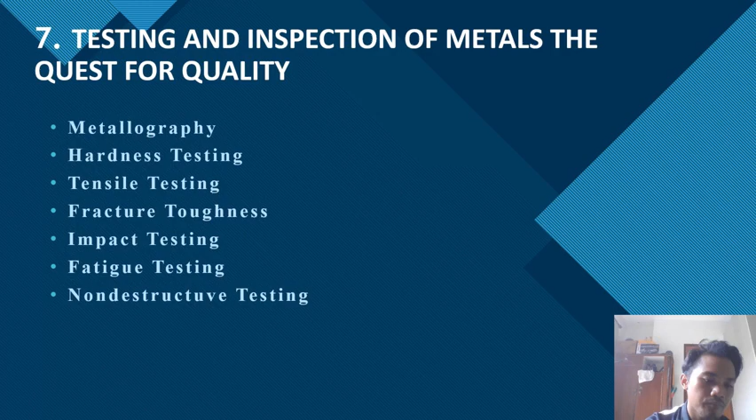Hardness testing is one of the most common non-destructive methods used to test metal products. Another important tool is metallography, which is a basic tool that helped transform metallurgy from an art to a science. Metallography also gives metallurgists an important tool in evaluating the quality and condition of metal products. Now we go to the first, metallography.

Metallography is the scientific discipline of examining and determining the constitution and underlying structure of, or spatial relationship between, the constituents in a metal and alloy. The examination of structure may be done over a wide range of length scales or magnification levels, ranging from a visual or low magnification, like 20 times examination, to magnification over 1,000,000 times with an electron microscope. Metallography may also include the examination of crystal structure by techniques such as X-ray diffraction.

Some history. The critical factor in the light microscopy of metal is the surface preparation of the specimen. This is the basic insight made by the father of metallography, Henry Clifton Sorby, who in 1863 was the first person to examine properly polished and chemically etched metal samples under the microscope.

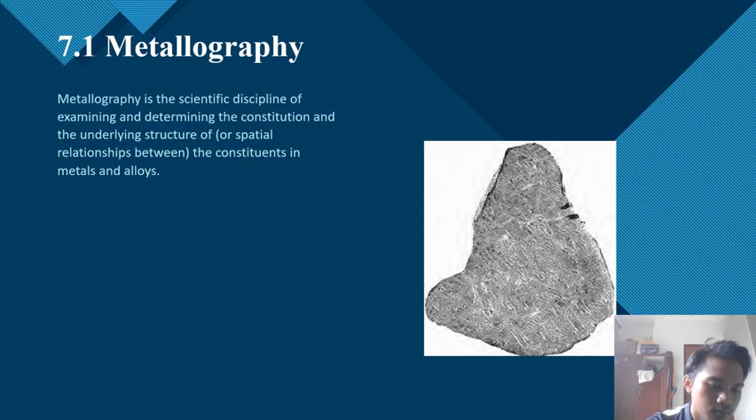Next, we go to hardness testing. In hardness testing, hardness as used in industry may be defined as the ability of a material to resist permanent indentation or deformation when in contact with an indenter under load. Generally, a hardness test consists of pressing an indenter of known geometry and mechanical properties into the test material.

Hardness testing may be classified according to various criteria such as the type of indentation measurement, area or depth, magnitude of the indentation load, and nature of the test, i.e. static, dynamic, or scratch test. For example, the measurement of the indentation is used in the Brinell, Vickers, and Knoop hardness tests. In contrast, indentation depth is measured during the Rockwell hardness test.

Hardness tests may also be classified based on the magnitude of indentation load. These tests are often grouped in three groups: macro hardness tests with indentation load above 1 kgf, micro hardness tests with indentation load up to 1 kgf, and nano hardness tests with indentation load that may be as small as 0.1 millinewton to 4 newton, and with depth measurement in the 20 nanometer range.

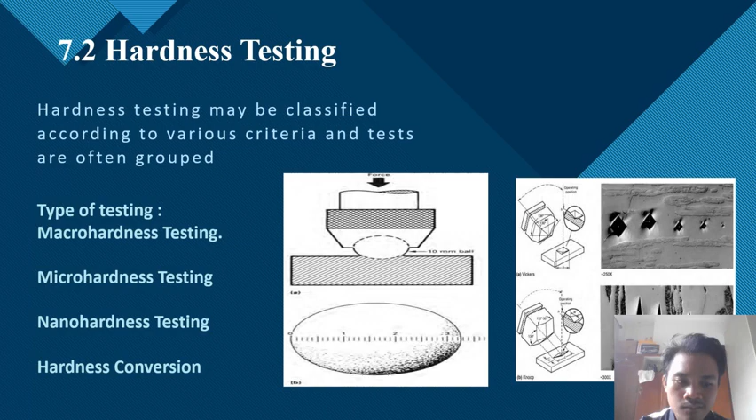Next we go to tensile testing. Tensile testing, mechanical testing of the specimen under tension, is by far the most common type of mechanical test that is performed. The properties derived from tension testing, as described in chapter 3 in this book, Mechanical Properties and Strengthening Mechanisms, include stress-strain curves showing the elastic and plastic strain regions of the deformation under load, and tensile yield strength, indicating when the elastic limit is reached with some appreciable amount of plastic deformation, typically set at

0.2% plastic strain. And the third is ultimate tensile strength, or UTS, defined as the maximum load F max divided by the original cross-sectional area of the specimen A0, so we can calculate UTS equals F max over A0.

Now the first is testing machines. Mechanical testing machines have been commercially available since the late 1800s and have evolved from purely mechanical machines, such as the popular Little Giant hand crank tensile tester of Tinius Olsen, circa 1900. And the Little Giant, you can see, is the machine in this picture, and these are the people who operate the machine.

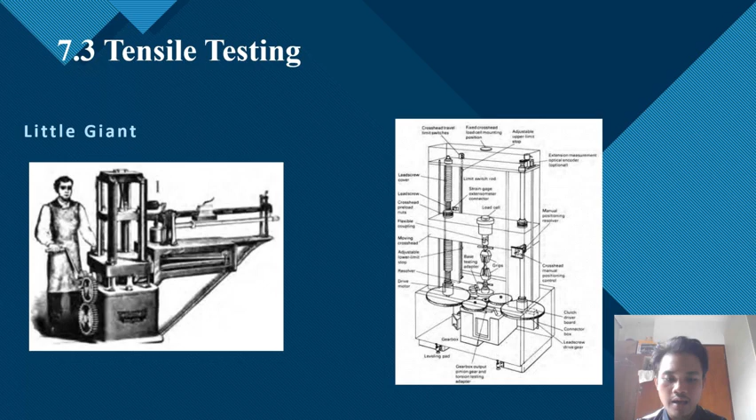And next we go to fracture toughness. Plastic deformation in crystalline materials occurs by a process of shear, as we can see in chapter 3, Mechanical Properties and Strengthening Mechanisms, in this book. The actually measured shear strengths of real engineering materials are often several orders of magnitude lower than the theoretical shear strength of a perfect defect-free crystal structure.

And fracture toughness testing: with the advent of linear elastic fracture mechanics, engineers now realize that the design of structures and machines can no longer, under all conditions, be based on the elastic limit or yield strength of materials. Various tests have been developed to measure the fracture toughness of materials, and these tests are generally conducted on test specimens containing a sharp, preexisting crack.

Five different standard specimen geometries are specified in ASTM E399. But most fracture toughness tests are conducted with either the edge-notched bend or compact test specimen. And you can see it in this picture. This is one of the compact test specimens.

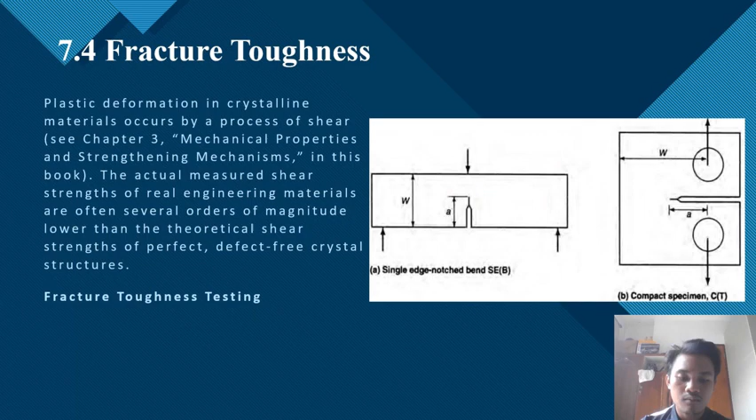Next, we go to impact testing. In impact testing, the specimen is subjected to dynamic shock loading to evaluate the response of the materials to a rapid change in loading, such as that experienced by an axle shaft when a car hits a pothole. A standard impact test operation we can see here. This is the standard operation, where a specimen is placed in the path of the swinging pendulum. The pendulum must bend and/or fracture the specimen if it is to continue its arc.

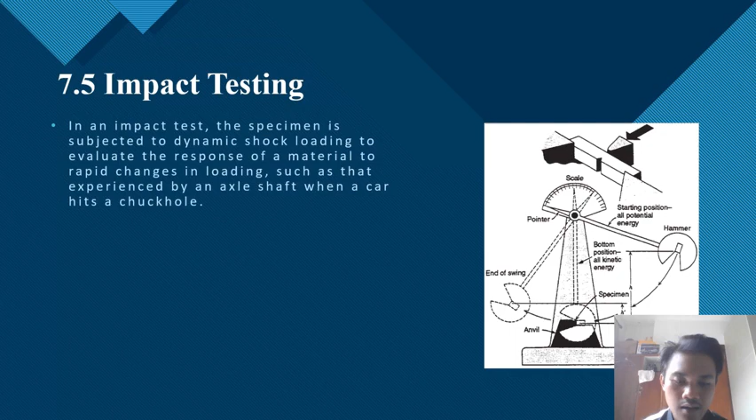The amount of energy required to break the specimen is absorbed by the pendulum, which then reduces the height to which the pendulum rises. The difference between the height to which the pendulum can rise unimpeded, h, and the height to which the pendulum rises after breaking the specimen, h', represents the energy absorbed in breaking the specimen. This energy, h minus h', expressed in newton meters or joules, J, or foot-pounds, ft·lb, is called the impact energy of the material being tested.

Next, we go to the fatigue testing. Parts subject to repeated cyclic stress often fail in service, even though the applied stress may be well below the yield strength of the material. This applied stress may cycle between tension and compression or between a minimum and maximum value of tensile stress. In addition, the magnitude of the tensile stress may vary over time.

Fatigue is the progressive, localized, and permanent structural damage that occurs when the material is subject to cyclic or fluctuating strains at nominal stresses that have maximum values less than, and often much less than, the static yield strength of a material. In general, fatigue normally consists of a crack initiation phase followed by a crack propagation phase. The separation of the fatigue process into initiation and propagation phases has been an important observation in the transfer of the multi-stage fatigue process from the field to the laboratory.

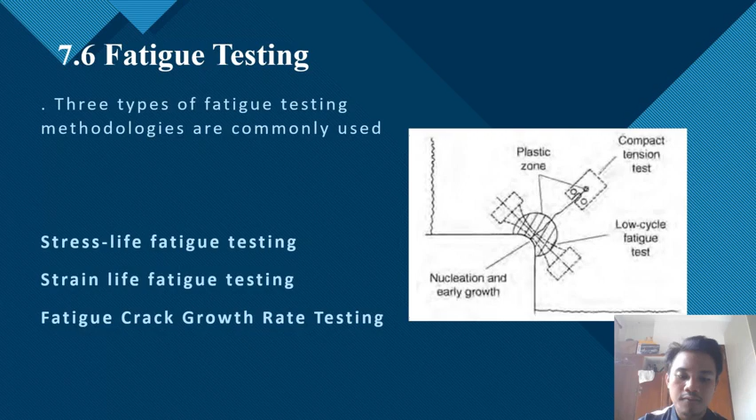And last we go to the non-destructive test. Various non-destructive testing (NDT) and inspection techniques are commonly used to detect and evaluate flaws, irregularities, discontinuities, or defects in engineering systems. Of the many different NDT techniques used in industry, liquid penetrant and magnetic particle testing account for about one half of all NDT. Ultrasonic inspection and X-ray methods account for about another third, eddy current testing about 10%, and all other methods total only about 2%.